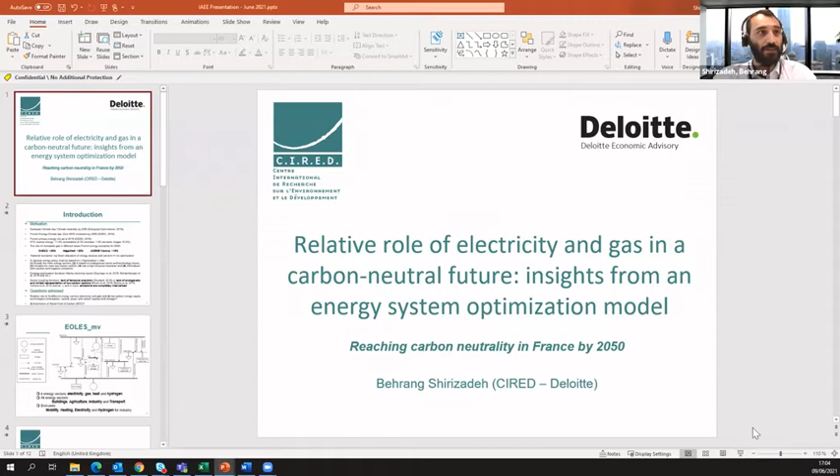Thank you. Hello, everyone. Just to make sure, do you have my screen? Yes. Oh, yes, yes. Great.

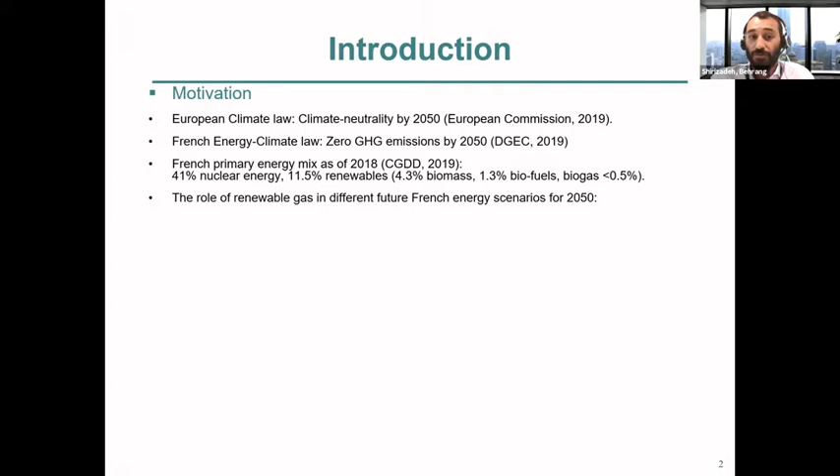But the role of renewable gas in different French energy transition scenarios, as you can see, SNBC2, the French Ministry of Ecological Transition and Solidarity's official plan of the country, is 20% by 2050. Negawatt, a French association, also projects 20%, and ADEME, a French half public energy and environment agency, predicts 16%. However, we are quite far from it. As you can see, in biogas, we are less than 0.5%.

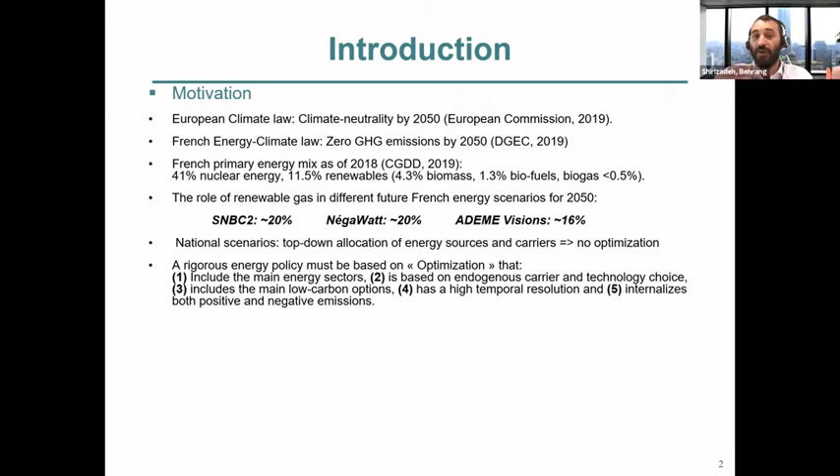But all these scenarios, they are quite interesting and nice, but they are all top-down allocation of energy sources and carriers. So there is no optimization. However, we believe that a rigorous energy policy should be based on optimization, where we should include the main energy sectors, and it should be based on endogenous carrier and technology choice. And also it should include most of the low carbon options, not all, but at least some representative ones. And it should have at least an hourly temporal resolution to take into account the variability of renewable technologies. And also we should be able to internalize positive and negative emissions by some social cost of carbon introduction.

Well, when we look at the existing literature on optimization, we see that it's mainly on the electricity sector. However, recently we had some sector coupling literature, basically coupling different sectors and allowing an endogenous interaction between them by optimizing the whole system. This is called sector coupling. And this is the most optimal case for a full system.

However, these existing studies that are quite recent are either suffering from lack of temporal precision, or a lot of sectors are chosen by top-down allocation, so exogenously, such as these recent works of Tom Brown, for example, that are very concentrated on electricity and electrification. And also in none of these studies are emissions internalized correctly. I'm going to talk only about direct emissions, but even direct emissions are not really internalized because we don't have any payment for negative emissions and we don't have any costs for positive emissions, but it's mostly based on some emission capping mechanisms and shadow price for carbon dioxide.

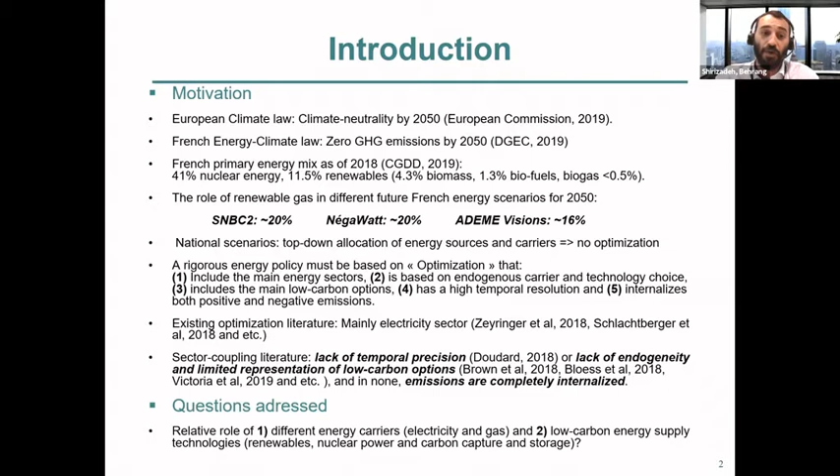So what we asked as questions is, what is the relative role of different energy sources: renewables, fossil sources with or without carbon capture and storage (CCS), and nuclear power? And also, what about the different energy carriers?

And of course, the importance of the social cost of carbon, which is basically the value that society attributes to one extra ton of emissions of carbon dioxide, which is presented like a carbon tax, in euro per ton CO2, but a carbon tax is only a positive emission value. However, the social cost of carbon can also be negative and it can give some remuneration.

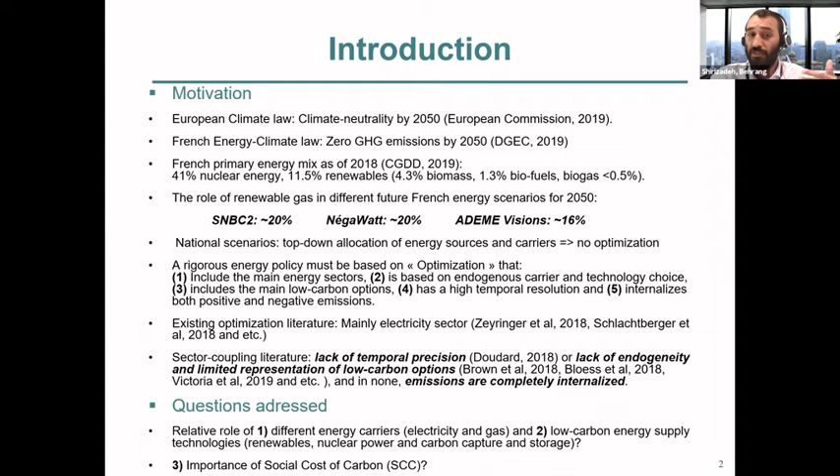So to do so, I developed an energy system optimization model. So let's take a look at this simplified version first. We have this electricity network, as you can see, with its own production technologies in round, and also its storage options, and a load, which is in triangle, electric load.

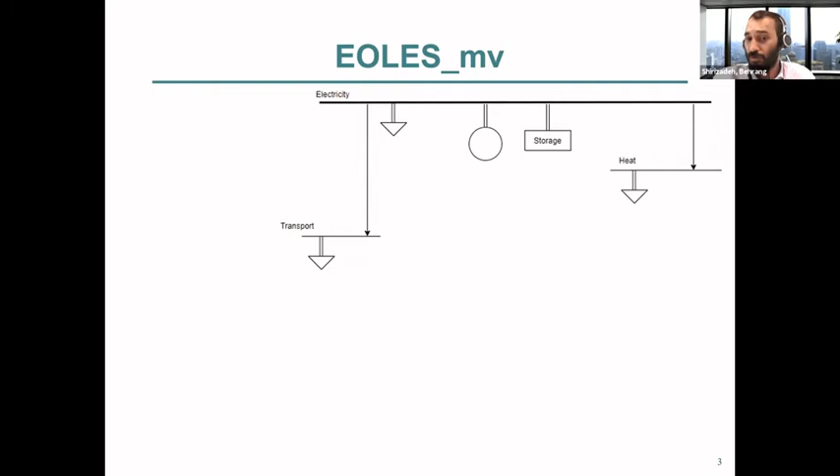First of all, we can decompose this load to have specific electricity load and transport sector, and also heat load for heating from electricity, and also hydrogen if we are to replace coal in the industry by hydrogen. And we can also then take into account the gas network with its own supply options, mainly natural gas and renewable gas technologies, so methanization or pyrogasification of biomass, and with its storage, which is already existing.

So we can also satisfy the transport and heat demands partially by the gas network. And also we can produce electricity from gas by thermal plants with or without carbon capture and storage. And also we can do some power to gas by methanation, from electricity to gas.

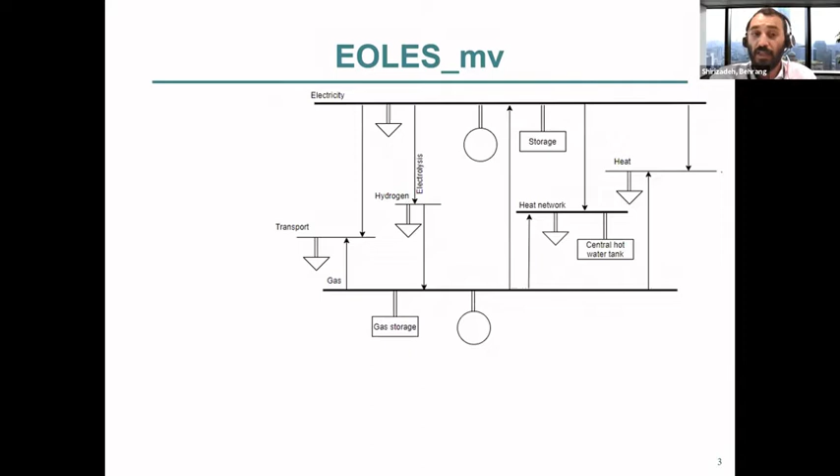On top of that, we can also take into account the heat network, which can satisfy a part of heat demand, which should be low temperature heat demand, and it should be a dense area. So basically the big cities, or at least cities, with, of course, its own storage options.

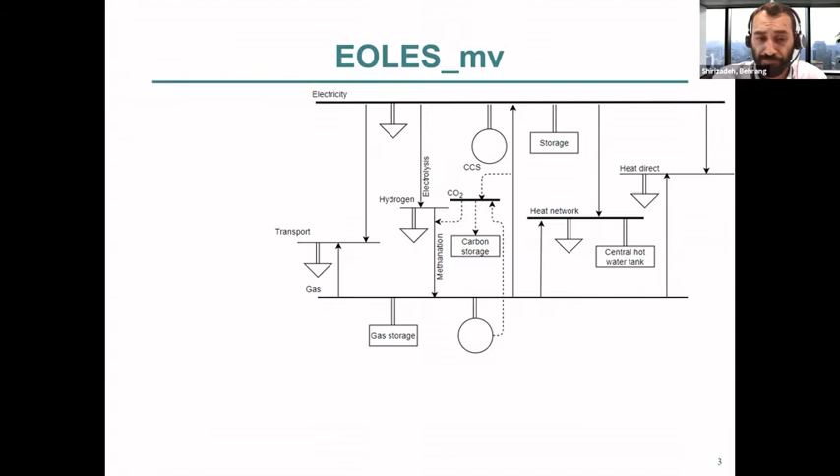So we can consider a carbon dioxide network as well, because we are supposed to maybe capture some carbon dioxide to store it. And also we can do methanation by using biogenic carbon dioxide, which is a byproduct of methanization, so anaerobic digestion. So then we will also need to account for the network for carbon dioxide. So it becomes something like that. There are a lot of technologies. I'm not going to enter into them, but supply technologies are less.

What I consider here are four main energy vectors: electricity, gas, heat, and hydrogen, because we are probably not going to have coal by 2050, at least officially, we are not expecting it as an energy source. Of course, we may have it as primary material, but not as energy source. And also, I consider all the main energy sectors, so buildings, residential and tertiary, agriculture, industry, and transport. And the main end uses: mobility, heating, specific electricity, and hydrogen for the industry.

Of course, heating is classified in three groups: low temperature, which can be every technology; mid temperature, which is some of the electrical technologies and combustion of gas; and high temperature, so more than 300 degrees, mainly in industry. And although we can produce high temperature heat from electricity, it requires a lot of structural changes. So I consider exogenously that it can only be produced from gas combustion, so renewable or natural gas.

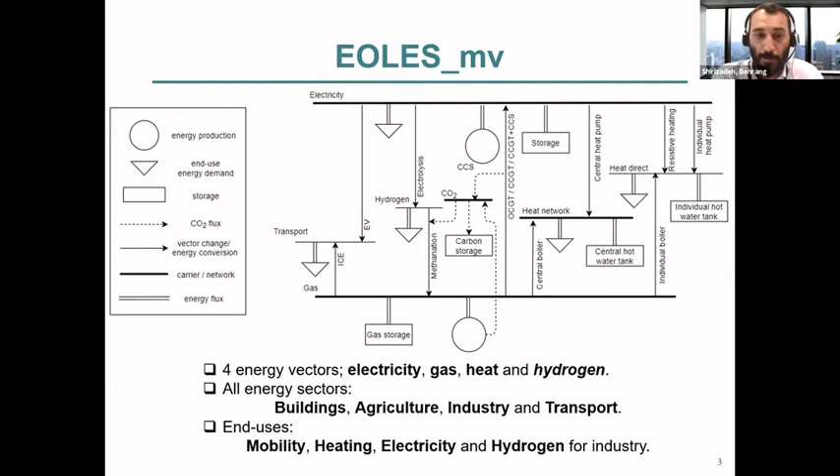So I applied this model to continental France, and the horizon that I consider is 2050. So all energy demand, cost, technical and availability constraints and potentials are 2050 forecasts. But we don't have weather data for 2050, at least not publicly available in hourly resolution. So I consider 2006 as a representative weather year, based on a previous work where I modeled 19 years, and we had concluded that 2006 is a representative year for the period from 2000 to 2018 for France, and it's kind of half a climate cycle. So it is reliable, let's say.

That's what we consider. And this is of course a greenfield optimization model. So it's only a static model, and I'm just going to show you an ideal 2050, where we are constructing it from nothing, if we do some optimal investments based on all these hypotheses that I counted.

So let's take a look at the primary energy production. This graph shows the yearly energy production from each of the technologies as a function of the social cost of carbon dioxide. So I made a variation from 0, no social cost of carbon, to 500.

The colors are representing the different technologies. So this brown color is natural gas. The dark green is methanization, so anaerobic digestion. So this is a renewable gas, and pyrogasification of biomass is the light green. So it's also renewable gas, but it's produced from biomass, so it's produced from solid renewable sources.

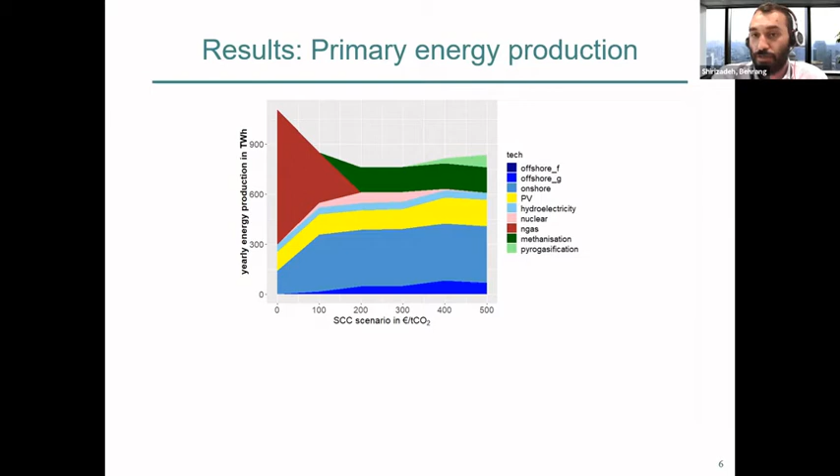So here, well, let me just clarify one point. All these gas production technologies are represented in terawatt-hour thermal, so their useful form. And all the electricity production technologies, so nuclear and the renewables, are all presented in terawatt-hour electric, so they're useful primary energy source.

If we take a look at this, we can see that without any social cost of carbon dioxide, more than 70% of primary energy comes from natural gas. However, as we increase the social cost of carbon dioxide, so I will call it SCC to make it faster, it reduces, and we can see that for 200 euros per ton of CO2, we have no natural gas in the system. So basically there is no fossil. And this is natural gas phase out.

On top of that, although the energy system seems quite highly electrified, as you can see up to this pink color, mostly it's electricity, but still we have at least 20% of gas, mainly renewable now, once it's carbon neutral. We have at least 20% of gas as an energy source, energy vector.

And nuclear power, as we can see, appears for 100 euro per ton of CO2. So this is the pink color, and it never exceeds 8%. And it also disappears at high social cost of carbon dioxide. I'm not going to enter into details, but it's because we do a lot of methanation when we have high social cost of carbon dioxide, to burn this methane to produce electricity with carbon capture and storage to make money from negative emissions. That's the reason, but I'm not going to enter into detail because I'd lose a lot of time on it. But you can ask questions if you want any clarification.

So each energy carrier, for example electricity, this graph shows the electricity production from different technologies. And the negative part is the use of electricity in different sectors other than specific electricity demand. I'm not really going to enter into the details because the main messages were already in the primary energy supply side. I'm going to mostly go to transport and heating sector. But before that, I also want to show you the gas supply and, again in the negative side, the use of gas in different sectors.

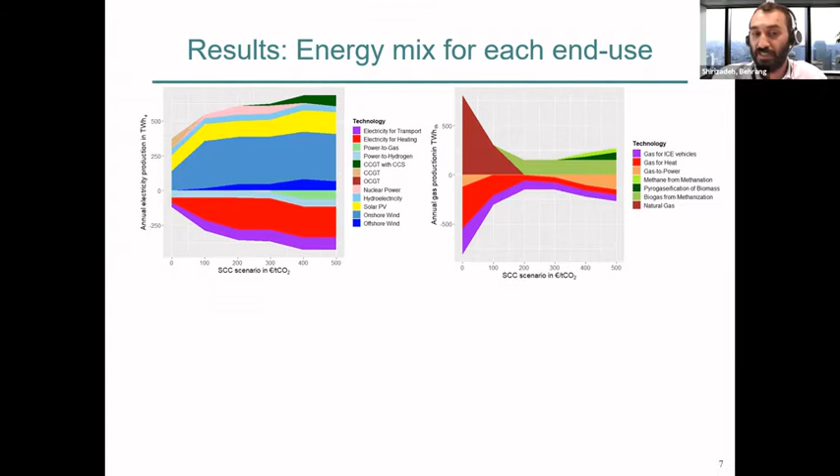This graph shows the annual transport demand in billion vehicle-kilometers. So this blue color is electric train, which is fixed exogenously because we already have electric trains. And this light green is electric vehicle for light transport. We don't see it, but there's a very tiny bit of electric bus on top of that, but it's really nothing. And then we have dark green, we can see a bit of it. It's electric vehicle for heavy transport.

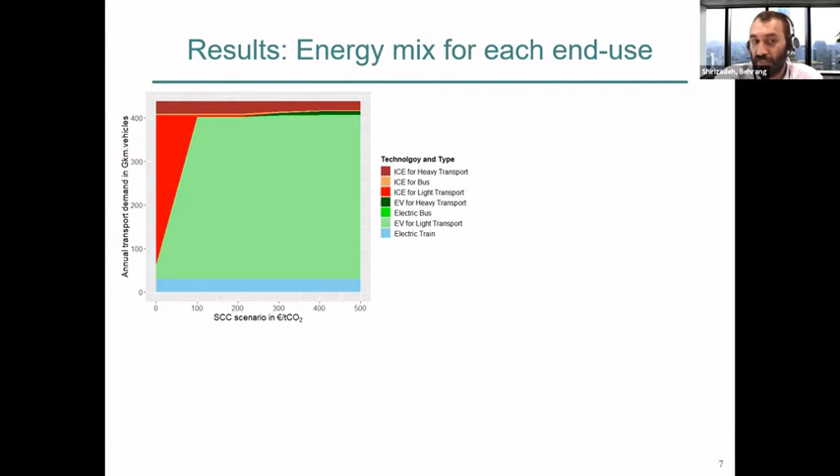And then we go to reddish colors, which are internal combustion engines based on gas. So I have only gas and electricity as vectors, but we can also consider gas as a representative for liquid fuels as well. We can see that without any social cost of carbon dioxide, most of the transport is gasified. Actually, even light transport is nearly completely on gas. But by increasing the social cost of carbon dioxide, even for €100 per ton of CO2, nearly all of the light transport is already from electric vehicles.

But still, as you can see, the heavy and bus transport sectors are still remaining gas fueled, even for high carbon tax, although we have a small part of electricity in them. So basically we have a highly electrified transport sector, but not for all the types. And of course, I don't consider boats and airplanes, which can be different. I'm just considering internal transportation of France with no airplanes nor boats.

So if we take a look at this second graph, this is heat demand and also production by source, again, as a function of social cost of carbon dioxide. Again, here we can see that for zero social cost of carbon dioxide, we have around 80% of heat production from gas. However, as we increase the social cost of carbon dioxide, this light green, which is resistive heating, this red color, which is centralized heat pumps, and this orange, which is individual heat pumps, are taking over, and it becomes like half electric and half gas.

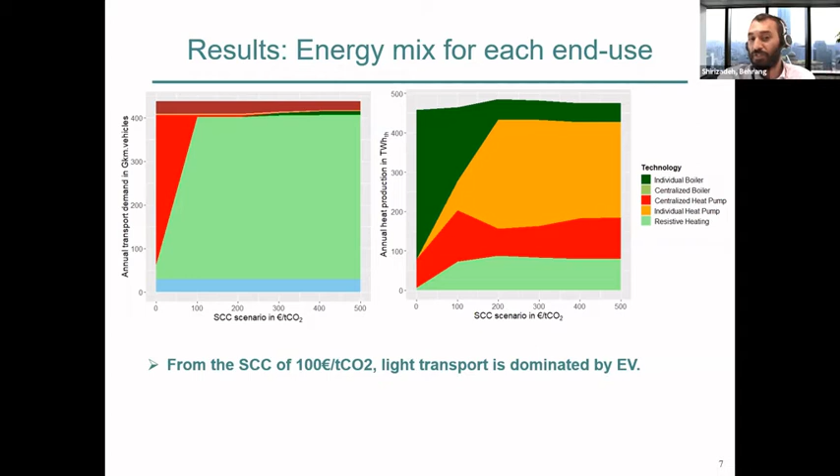And again, as we increase it from 200 on, most of the heat is electrified. And this small part, which is remaining still in dark green, which is individual boilers, this is because of the industry. So high temperature heat demand that I already fixed, that can be only satisfied by gas.

So now let's take a look at the emissions of such a system. So again, this is the emissions of the energy system, direct emissions, of course. I'm not considering indirect emissions, as function of social cost of carbon dioxide. As we can see, for zero, we have high emissions, like more than 150, nearly 200 actually, megatons of CO2 emissions. But as we increase the social cost of carbon dioxide, we decrease obviously, and we reach carbon neutrality at €200 per ton of SCC value. And as we increase it, we can go up to minus 25 megatons of negative emissions.

And Behrang, if we take it, yes? You have 5 minutes, okay? 5 minutes left. Great, thanks.

And if you take a look at the cost, here I have to make a small definition. In my objective function in the optimization, I have the social cost of carbon dioxide, which is internalized. So we have basically a technical cost part, and on top of that, we have this virtual social cost of carbon dioxide, which is not virtual, but it's an internalization of an externality. So this filled line shows this social cost, including the social cost of carbon dioxide. But this dashed line is only the technical cost. It is only the material and physical cost of the equipment and energy technologies.

So basically this difference between these two is actually the value of emissions, so the cost of carbon dioxide emissions. So when the technical cost is below the social cost, it means that we have positive emissions. And when it's above the social cost, so this dashed line is above the filled line, this is the other way around. So we have negative emissions.

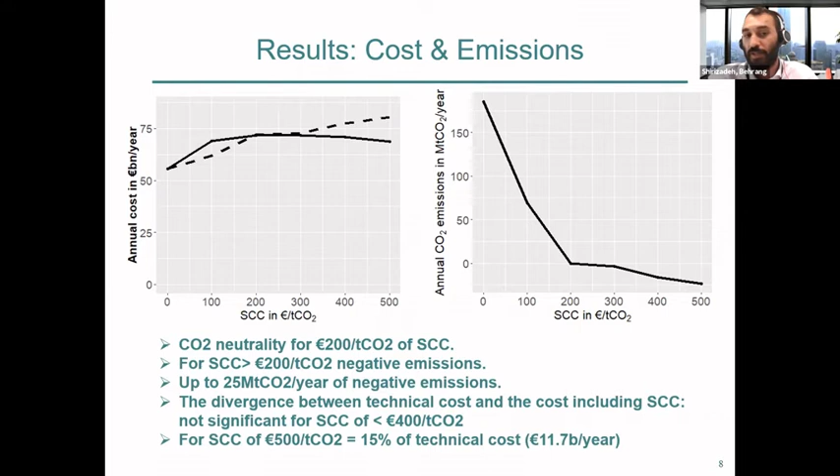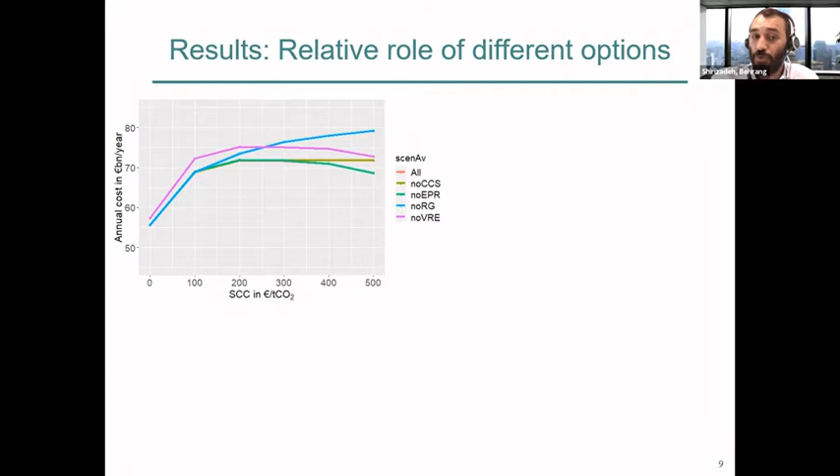So what we can conclude here is that variable renewable electricity technologies and renewable gas are the main enablers of cost optimality in the energy system in a carbon neutral future. And if you take a look at the emissions graph, the colors represent the same scenarios. This one is the annual CO2 emissions as a function of social cost of carbon dioxide. And as we can see, it's again the same message, renewable electricity and renewable gas.

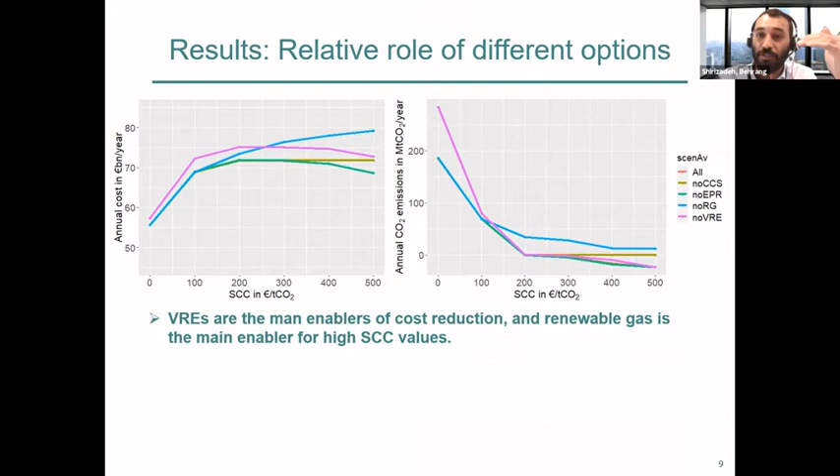However, this green color shows the nuclear power, which actually sticks to the red one in both of the cases. So nuclear energy has very limited and small environmental and economic benefits in a carbon neutral future.

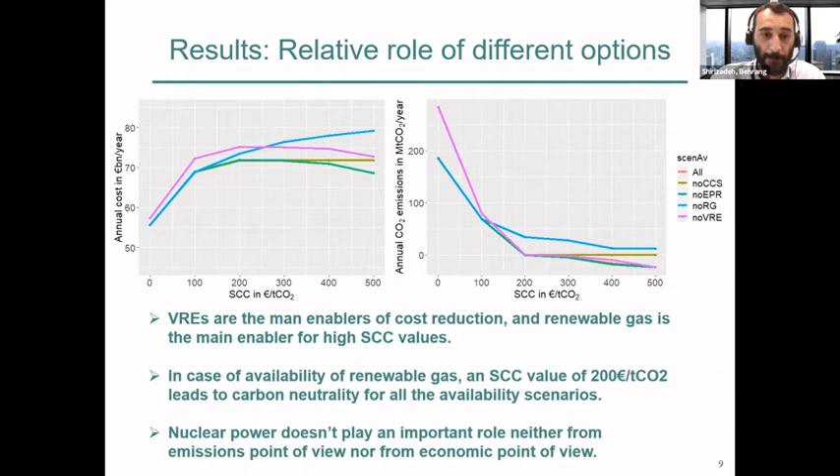So that's all. I'm just leaving my conclusion here because I think I'm out of time. So you can just read and ask me any questions that you have. Thank you for your attention.

Thank you, Behrang. Very interesting presentation. Congratulations. It's very clear that the price of carbon will be key to the decarbonization process. I would like to know if any of the colleagues have questions for Behrang.

Yes, hello, Behrang. Thanks for this interesting presentation. I have two questions basically. So you considered France as an isolated system, but obviously France is not isolated. What could be the impacts of the neighboring countries on the system? Is there anything that you could say on this?

Yes, sure. Basically when we have a highly renewable system, the interconnections are helping to manage this variability. As we see, the optimal case is more than 90% renewable and even 100% for some social cost of carbon values. So having the interconnection with neighboring countries will help us to have this geographical aggregation and probably reduce the required storage.

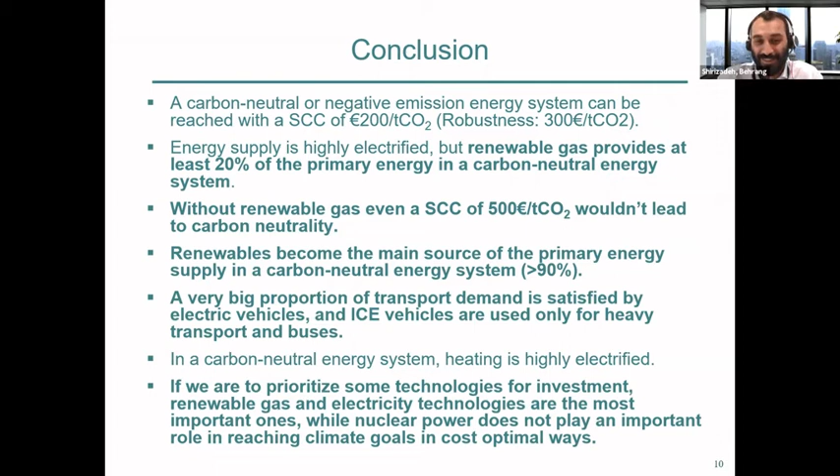I see. Thank you very much for your answers. Thank you. Any other questions for Behrang?

Actually, I'm very curious. You were talking about nuclear on slide 6, about the negative. It was negative costs, right?

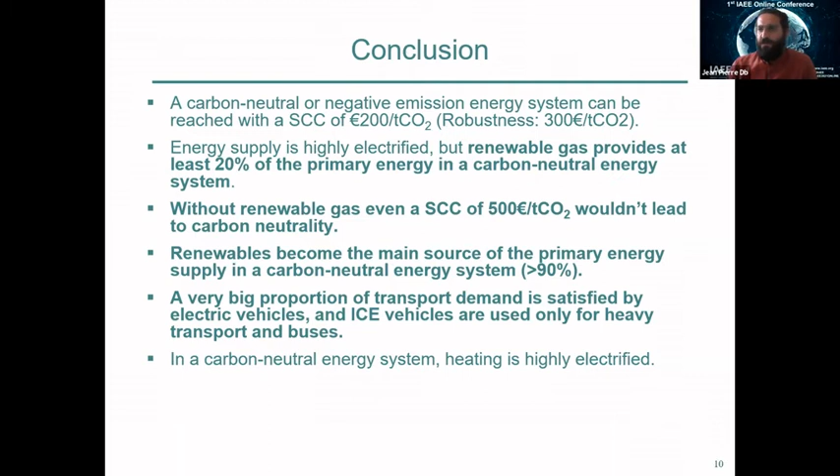Can you please explain about that, because it's actually very interesting? This here, right? When we don't have nuclear at 500 euros per ton of SCC. Well, the point is that nuclear power can be very useful to produce extra electricity because it has a small and dense electricity production, which renewables don't have. But there is another problem here: nuclear power also has its variable costs, both on the operational side and also in fuel and waste management and all these points.

However, renewables have zero marginal cost. So if we over-dimension the renewable electricity production side and produce more renewable electricity, we can do power to gas for free when we don't need it. Because in a fully renewable power system, in a previous study, I found that around 20%, even 25% of the time, the electricity price is zero. So if we do methanation for power to gas, we produce gas from this renewable electricity, whereas nuclear is going to be a bit more expensive.

It's going to be maybe 15, 20 euros per megawatt hour. So it's not an expensive price, but compared to renewables, it is more expensive from this market point of view. And that's the reason why we produce a lot of gas, but we don't need to consume that much gas. So we also do a lot of gas to power with carbon capture and storage to make negative emissions and make money from that.

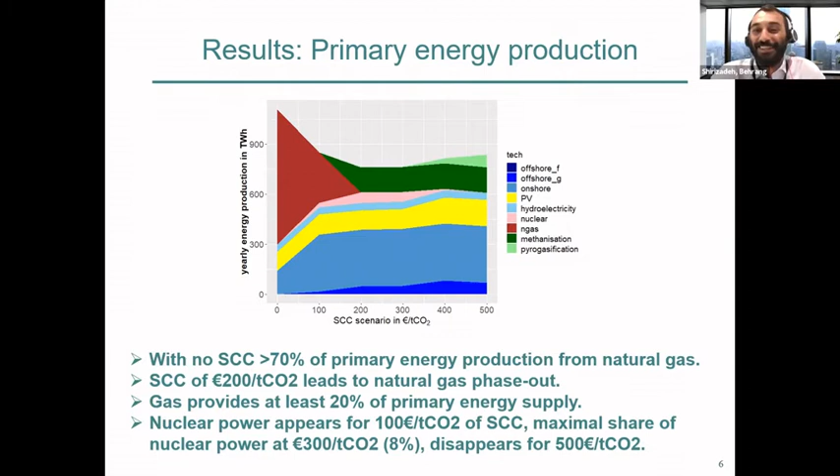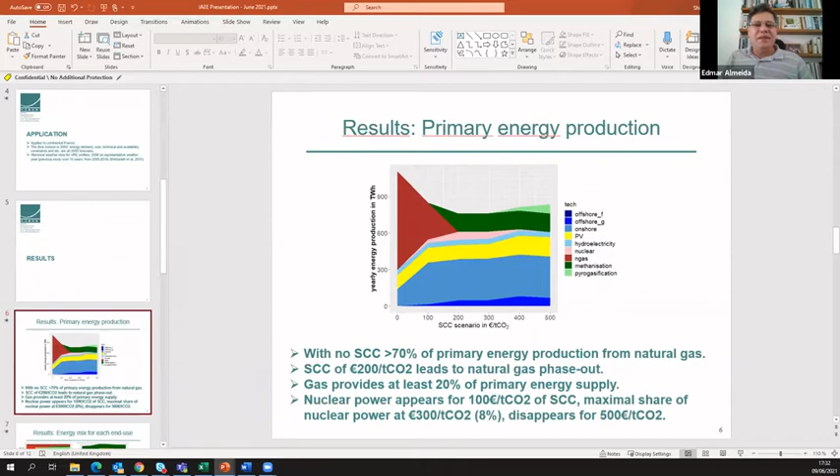I think we are running out of time and we should move on so we don't have problems with time for the other presentation. So now we're going to move to the presentation of Sebastian on obsolescence of the gas distribution grid in urban areas, an open source modeling approach for the gas phase out in local neighborhoods. You have 20 minutes, Sebastian. Have a good presentation.

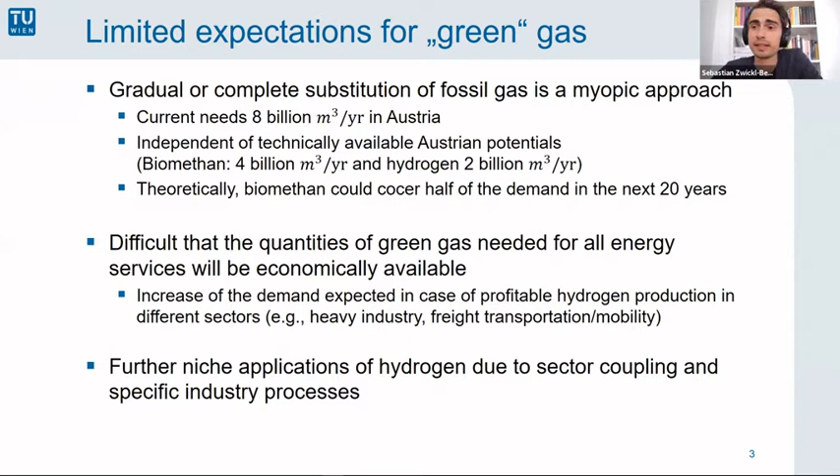So the scope of this work is, first, demystifying the unique or current dominant position of natural gas in the provision of heat services, in particular low temperature heat services, decommissioning of the existing gas distribution grid infrastructure, and also triggering emerging sustainable and highly efficient energy supply alternatives.

So these are the benefits, and we also want to show that continued repowering of conventional energy technologies is no future business case, no maintenance of known business models. And, as in the presentation so far, we want to include and internalize the costs of inaction, for example, in this work as penalties for failing to meet climate targets.

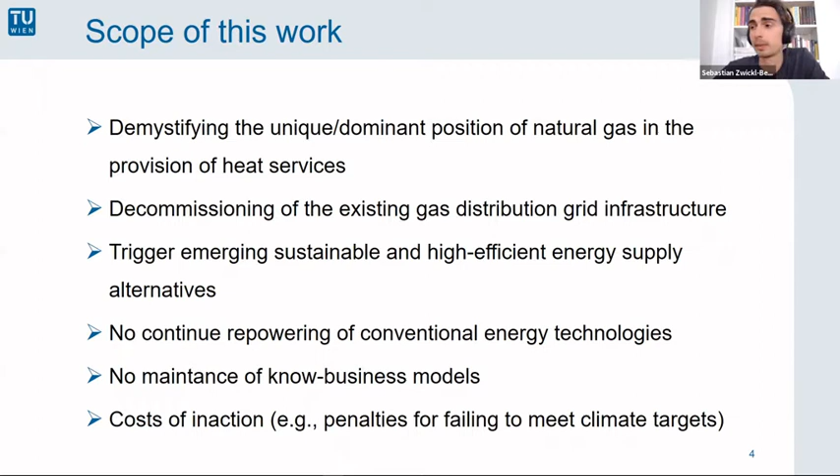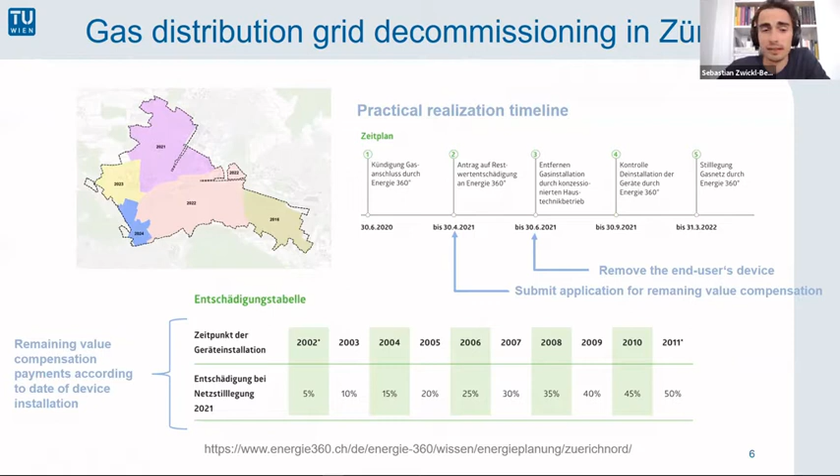So let's return to the core objective and novelties of this work. So first of all, as I said, the decommissioning of the natural gas distribution grid and corresponding natural gas phase-out in the low temperature heat supply of an urban neighborhood, to quantify alternative distribution grid capacities and highly efficient sector coupling technologies that are required to ensure an adequate but sustainable development in the provision of local heat energy services.

We analyzed in this work in particular two different deep decarbonization pathways on a local level. On the one hand, a high electrification scenario where we replace natural gas by electrification of the energy services. And on the other hand, a scenario which is called a network scenario, where we analyze an expansion of the district heating network all over the district.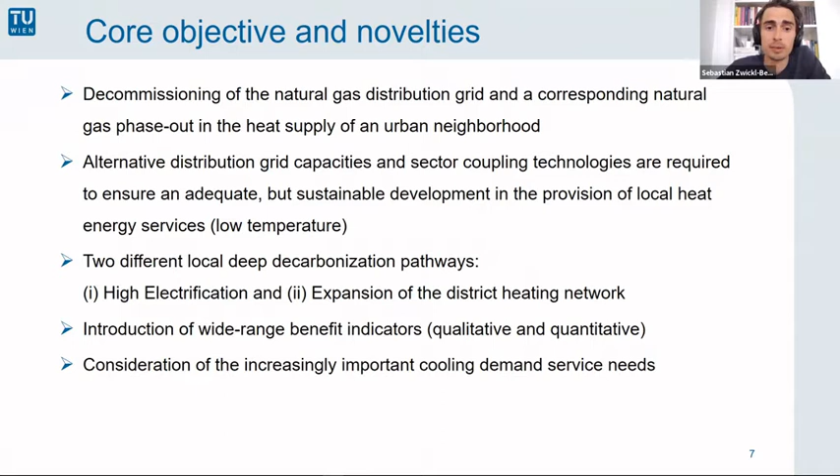We introduced a wide range of benefit indicators to quantify our results both qualitatively and quantitatively. And, this is to some extent very important, if we talk about heat supply or energy services on a local level, we also considered the increasingly important cooling demand service needs on a local level.

So let's jump into the description of the methodology applied. It builds upon and is an extension of one of our works recently published in Applied Energy. In this work, we focused on the energy sharing among different consumers within an urban district in Vienna. And we considered high shares of local renewable energy generation. And as one key finding in the sensitivity analysis, we analyzed different CO2 prices triggering a substitution of natural gas-based heat supply by other sustainable alternatives.

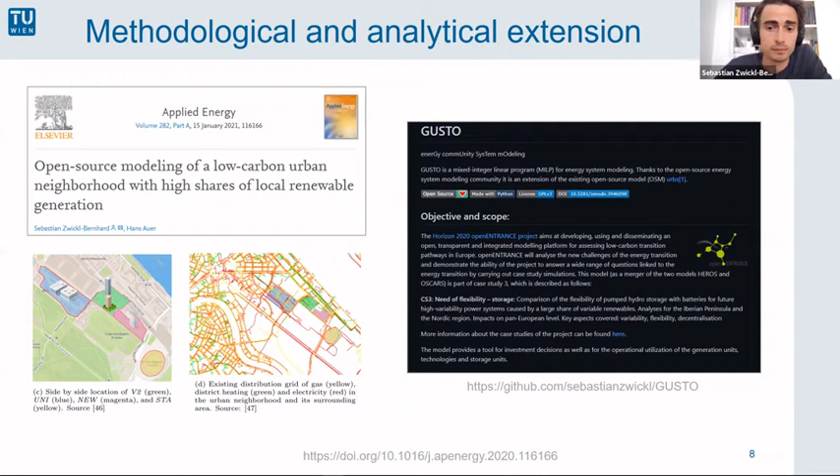So as I said, the model used in the Applied Energy submission is called GUSTO. This model enables a high temporal resolution of the energy demand. In this work, we analyzed the building stock of an energy community, of an urban district. Therefore, we split the existing building stock into different characteristic building types. And here you can see some of the inputs for our analysis of the natural gas distribution phase-out,

where we used the model GUSTO to estimate the increase of the peak demand per building type, as you can see on the left-hand side, for a characteristic multi-apartment building. The green line shows the baseline, the current electricity demand. The orange line shows the case of an electricity-based heat supply, and the blue one shows the electricity-based heat and cooling supply of a specific multi-apartment building within the area.

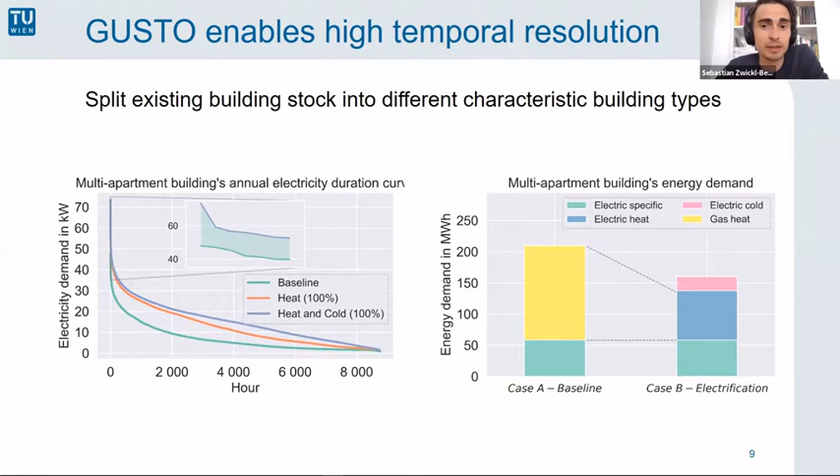So in the left-hand side figure we see an increase of the peak demand per building type, and this was used for a second open source model, which is called rivus. This open source model is developed by TU Munich and is also available on GitHub. GUSTO's peak load results are used in rivus, which is based on graph theory, as you can see in the right-hand side figure. It is a mixed integer linear program and enables cost-minimizing multiple energy carrier network expansion.

In the figure on the right, you can see the sources of a specific energy carrier indicated by the squares and the demand indicated by the triangles. And the model is used to optimize the network infrastructure on a specific distribution grid level.

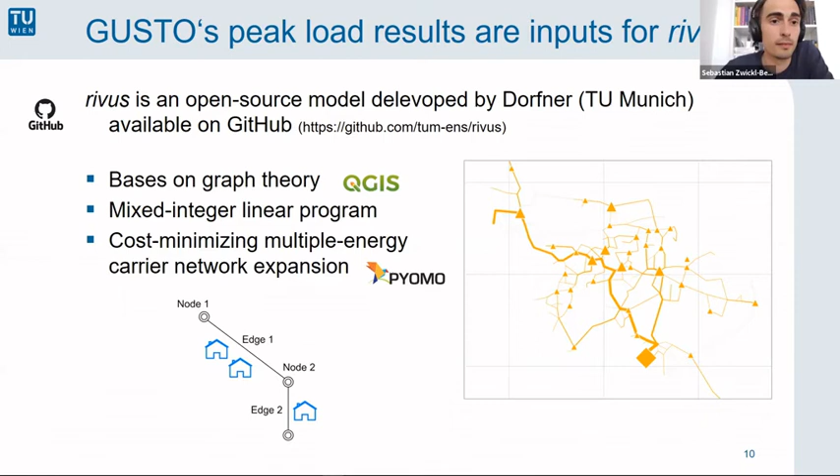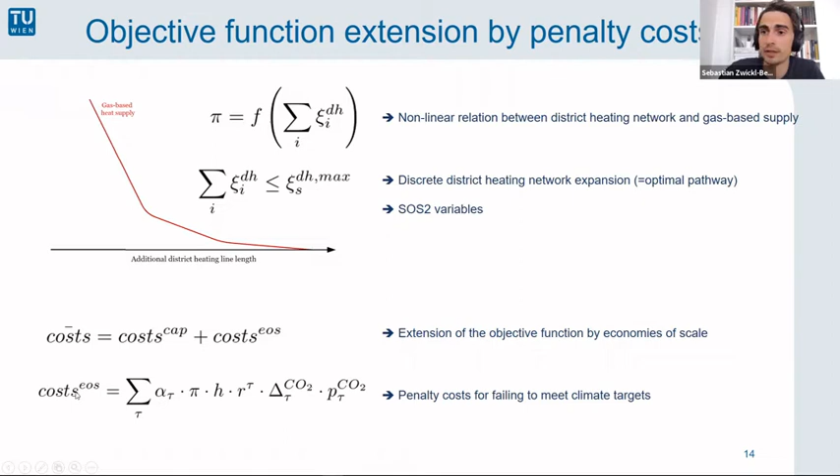meet climate targets. In the end, it's a result of this nonlinear function between additional district heating line lengths and gas-based heat supply. You can see here, π is, for example, the connection capacity of gas-based heat supply, and this is directly included into the cost part, which is called economies of scale for failing climate targets.

So now 5 minutes left. Fine, 5 minutes left for the results.

Yeah, fine. So now let's come to the results. Here you can see the fundamental results of this analysis, where you can see the distribution grid in the district for two energy carriers or two different networks. For example, electricity on the left-hand side and natural gas on the right-hand side. You also see, as I mentioned before, the different building type categories, where we split the building stock into different categories to assume or calculate the projections of increased peak demand.

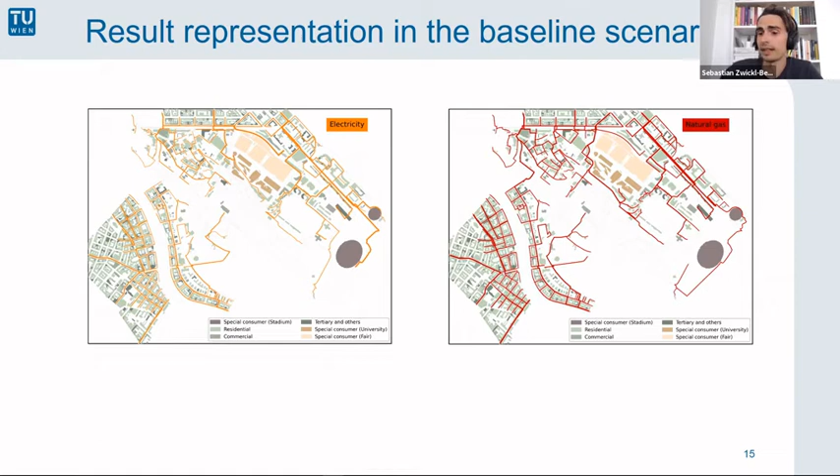On the right-hand side, you see a massive existing natural gas distribution grid within the district. Here you can see the results of the two different decarbonization pathways. On the left-hand side, as I said, the high electrification scenario, where we replace natural gas and supply the energy services on the basis of electricity.

And on the right-hand side, you see the network scenario, where we replace the gas distribution grid by a massive expansion of the district heating and district cooling network. On the left-hand side, you see the specific capacities illustrated by the violin plot for electricity and district heating. You see the comparison between the current state of supply, which is called case A, and case B, which is the high electrification scenario.

You see the difference in the max line capacity here, and also the difference in the mean line capacity here. And at the bottom, you see the heat map, where you can see the different possible lines that could be implemented to supply the area, the specific lines that are used in case A, and the additional lines that are used only in case B. And at the bottom, you also see the implemented line for the district heating network.

On the right-hand side, similar illustration of the results, so it's easy to compare the results. You see the difference in mean and max line capacities of the district heating network. And at the right-hand side bottom, you see the matching. If we consider the heat service needs and the cooling service needs, we see a high matching between implemented lines for the heating and the cooling network expansion. Only a few lines are unused in case C in the network example.

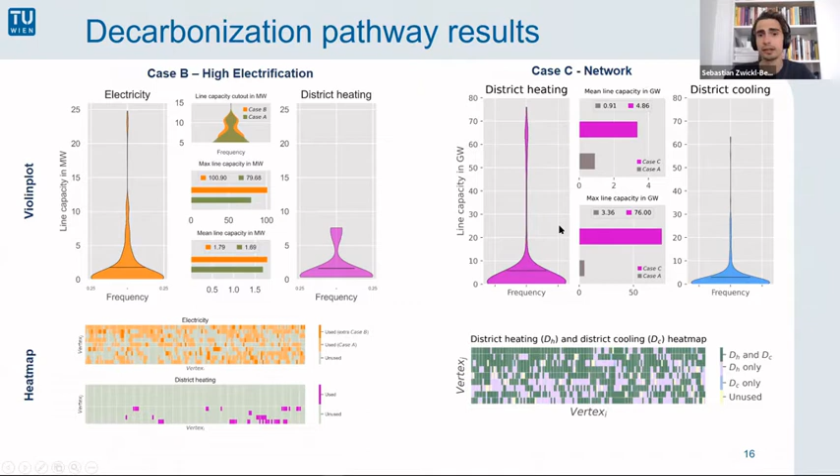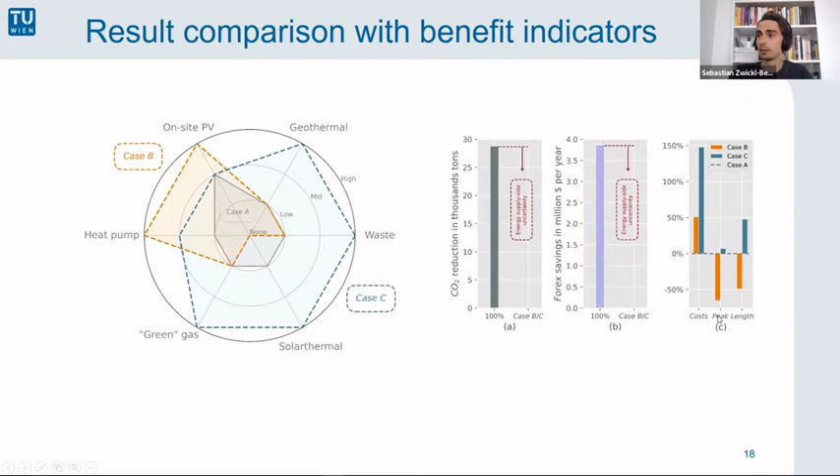And future work should address, among others, energy generation technologies and the mix feeding into the district heating or district cooling network, as I mentioned qualitatively here, waste incineration and seasonal heat storages. And of course, also include the local mobility service needs into the local energy service needs.

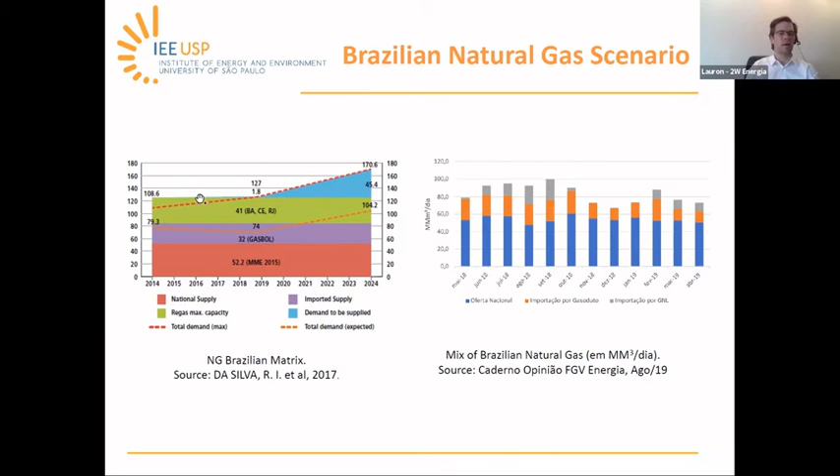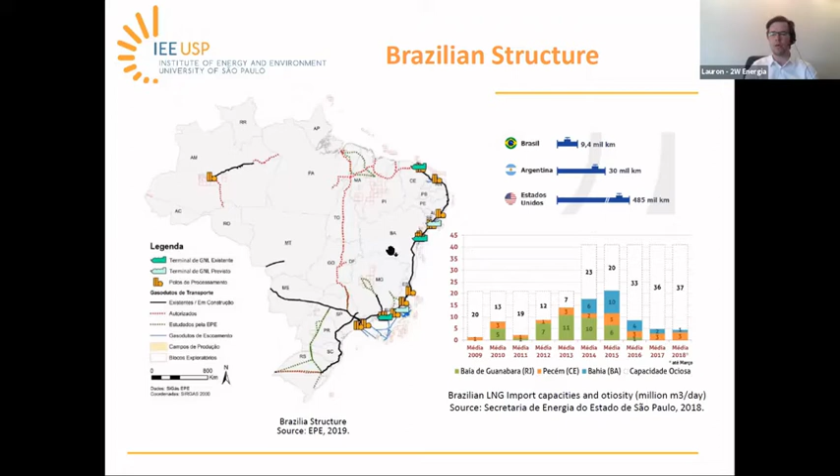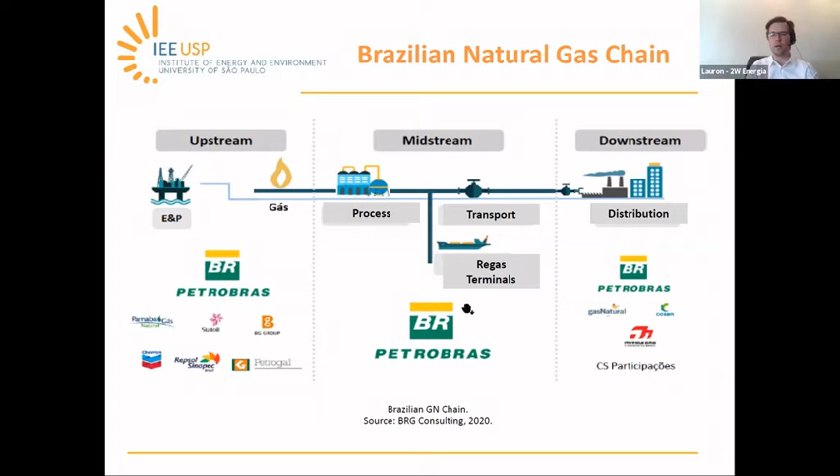With this new gas market that was created by the government, one of the main points is to eliminate the private monopolies, like the one I mentioned about Petrobras, and create some possibilities to give attractiveness to the market, make new players enter and operate in this market, create the opportunities, the financial possibilities and attractiveness for the new players, giving more integration with the electrical system,

giving more defined and clear rules about the operation of the thermal power plants, when they have to be put in the system. And one of the main points is the harmonization of the state and federal regulations that we have at this moment in Brazil.

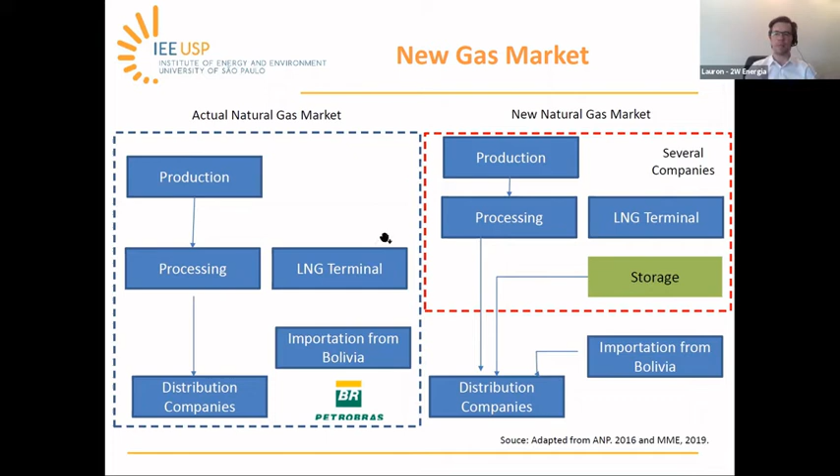So what challenges will Brazil face in developing an LNG market? Looking at the regulatory points, the new rules allow sharing the structure and the terminals, so different companies use the same terminals. Until this moment, that is a great problem in Brazil. All 3 terminals from Petrobras are operated just by Petrobras, and as we saw before, these terminals are not used at their full capacity. They can be used and shared with different companies.

About tax, the importation using a gas terminal ends up changing hands and becoming an internalized product. Here we have some problems with taxes when sharing a terminal. With different companies, it's difficult to separate the product and tax each one.

One challenge must be seen when we talk about LNG vessels. They represent a large storage capacity, and must be linked to a great consumer. That can be a problem. We can see a solution as an anchor, a great company as a main consumer, and it gives the opportunity to other little companies in a secondary market behind this great company, something like this.

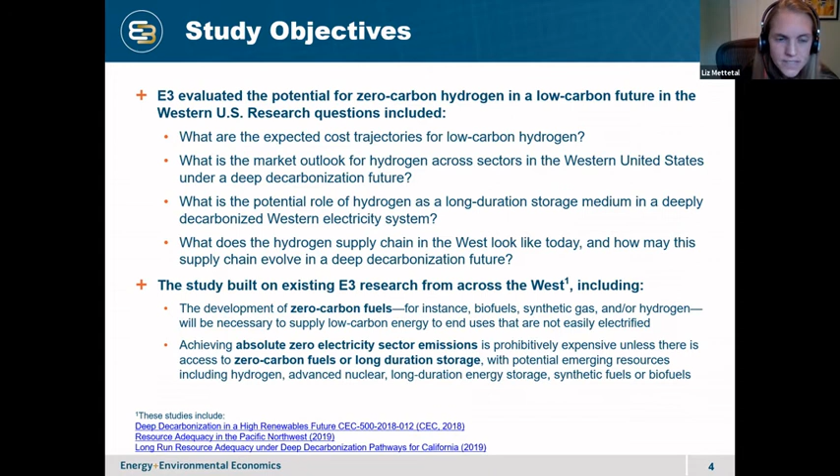So one other point I wanted to note is, why are we talking about a low carbon future? And that's because a lot of our modeling is not based on comparisons to, say, the social cost of carbon, which I think is super valuable and a very interesting comparison to do. But we're really, in this modeling exercise, focused on what does the policy say we have to do? And taking that policy assumption as given, and then looking at the cost-effective ways to achieve those policy mandates.

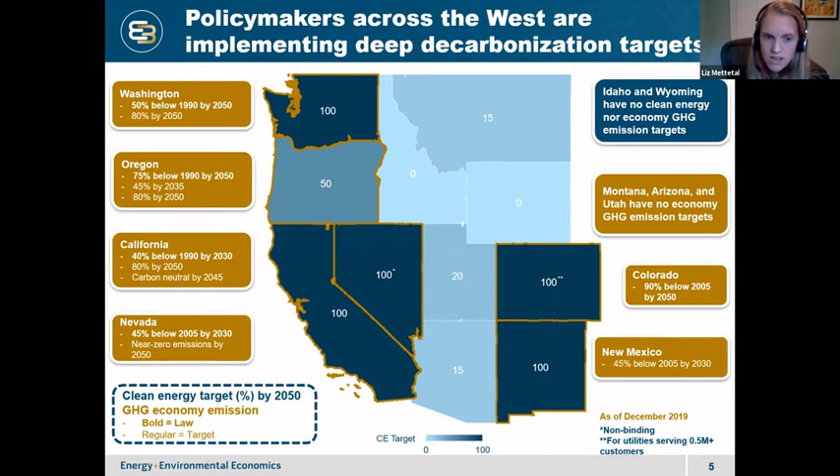So this is just a map of the West and the clean energy targets. The targets for the electricity sector are in blue, I believe, and the gold is the economy-wide emissions targets. What I'll draw your attention to is California, for example, has SB 100, which is a policy that basically says 100% of retail sales needs to be supplied by renewable energy and zero carbon resources, I believe by 2045. And then they also want to hit carbon neutrality. And there's several other states in the West that also have these deep decarbonization targets. And we use that in building some of the price forecasts that inform the modeling for this study.

So I'm going to start with a slide just on the production of hydrogen and what we assume about hydrogen production costs. Then I'll talk about some of the analysis that we performed and our key findings. So this is a spreadsheet model to estimate the cost of hydrogen. Basically, hydrogen can be produced by extraction from water or extraction from fossil fuels. And the cost of hydrogen is going to be extremely relevant to our assessment of its potential applications and how it might compete across different verticals.

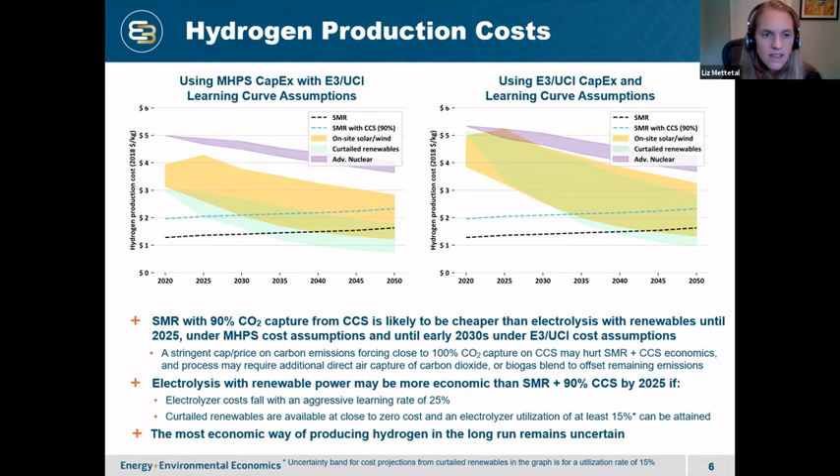So we did two main analyses that use those hydrogen costs for the power sector. We start with E3's Aurora market price forecast. E3 develops scenario-based market prices that reflect varying assumptions about future policy scenarios in the West. We used a deep decarbonization price forecast for the West that assumes attainment of the different renewable and clean energy targets being legislated in the West, assuming a lot of these states are going to hit their 100% renewable or clean energy targets. We're using the 2019 price forecast.

I'll note that some of these are 100% sales, and that doesn't quite equate to 100% generation. So you still see some gas generation on the system. Of course, if you're going to go to truly zero gas generation, 100% renewable generation, then that would just increase the opportunity for hydrogen.

So we take these market prices and we did two analyses. On the top, we did this E3 RESTORE analysis. RESTORE is basically an optimal storage dispatch model.

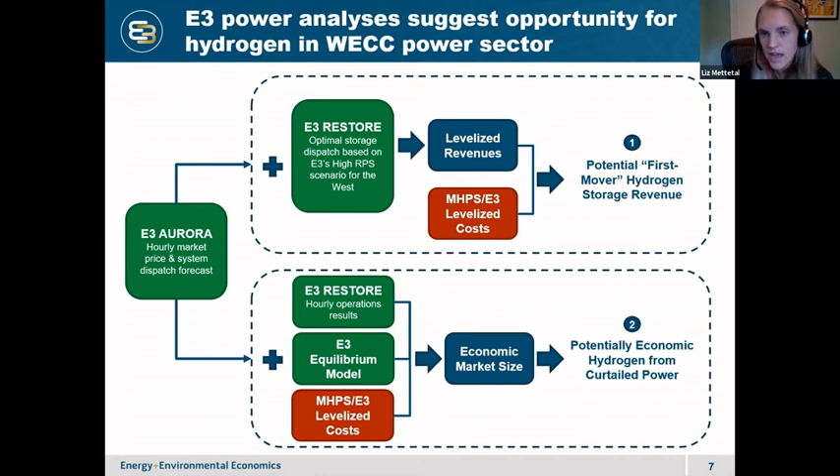One other point I wanted to make about the market is that we focus on the West here right now. The West is dominated by natural gas in California, coal in Arizona, some hydro in the Pacific Northwest. But given RPS targets and restrictions on natural gas, we anticipate that lots and lots of renewables are being added to the market, and we're already seeing that. And when we model market conditions in the West, what we find is what we call Dunkelflaute conditions. These are basically multi-day periods with low renewable output.

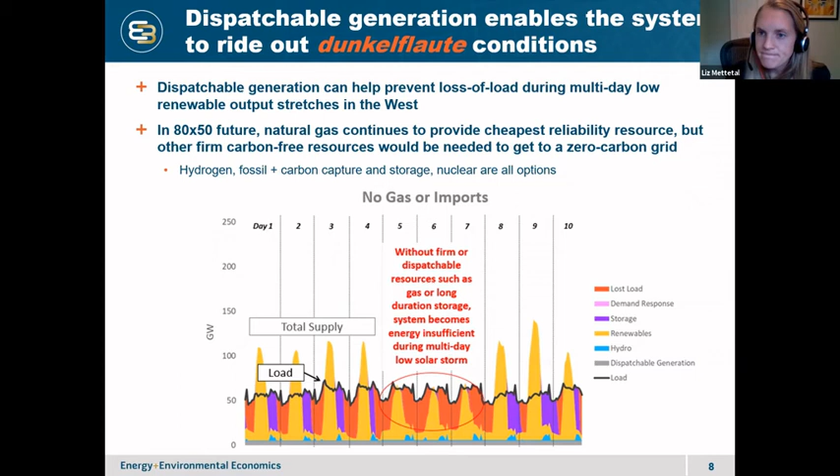You can see in this simulated day at the bottom, yellow is the renewables. They're over generating in the middle of the day. You're using it to charge storage. That storage is in purple. That battery storage can then dispatch after it's been charged. But when you have these multi-day periods with low renewable output, we're only adding batteries to the system that are economic. So you're not getting much above a 6-hour battery that's cost effective. So you basically run into these multi-day periods where you need some form of long duration storage or natural gas to fill the gap, or else we're ending up in loss of load situations. And that multi-day period is really where the hydrogen arbitrage is profitable.

Please, you have 3 to 5 minutes to finish. Great. Okay? Yep.

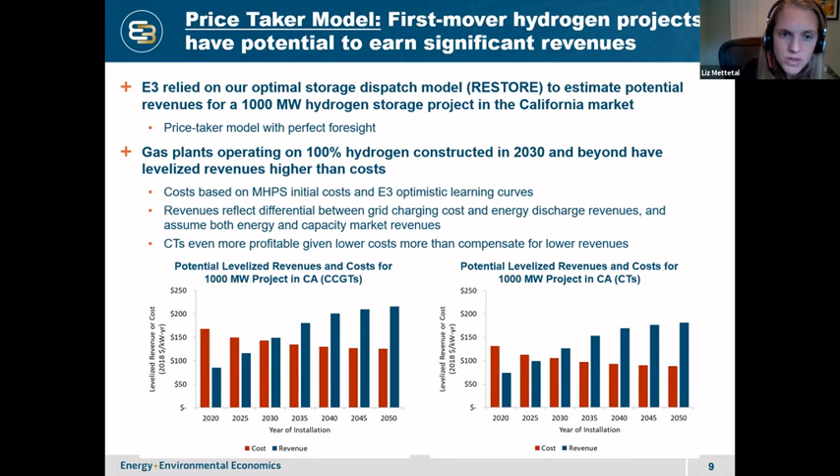I'm just going to give you a couple more punchlines on the results. In our first mover hydrogen market model, if you look at the lower left-hand side, you see the costs of a project are falling over time. That's driven by the reductions in the cost of hydrogen storage. The revenues are in the blue bars, based on the year of installation, shown every 5 years, and these projects start to become profitable around 2030. The revenues in blue reflect the difference between the energy discharge revenues minus the grid charging costs, assuming both energy and capacity market revenues from our market model. CTs are going to be less efficient, but their lower costs are really more than compensating for the lower revenues. So we find first mover projects by the 2030s are quite profitable.

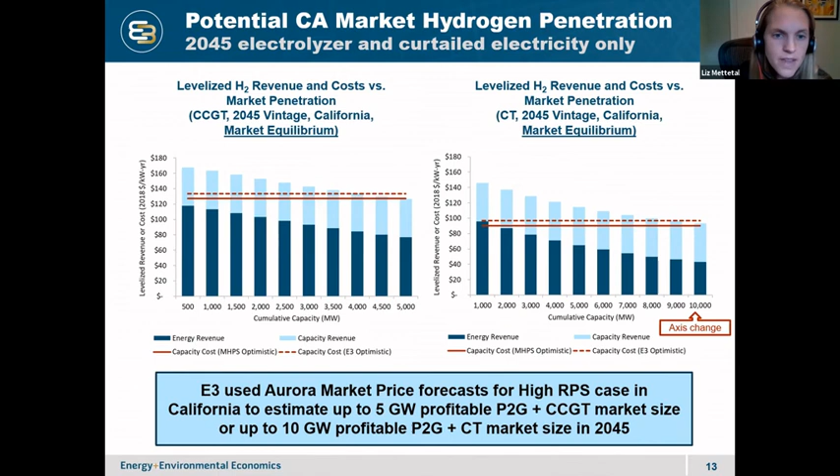So I'm just going to jump right to the takeaway. The takeaway from this study was that the most promising opportunity for carbon neutral hydrogen we found was as energy storage in the electricity sector, given those really aggressive RPS and 100% clean energy targets. Our estimate is a market size of around 10 gigawatts in California, and, not shown here, around 4 gigawatts in the Pacific Northwest. This was part of a much broader study, as I mentioned up front. We looked at other sectors of the economy and identified roles, particularly in heavy duty ground transportation, that hydrogen might play if they can reduce station costs.

But I think hydrogen's role is a bit more uncertain in buildings and industries where there are big structural and infrastructure barriers. And then I'll note that, as the production cost figure showed, the means of producing carbon neutral hydrogen in the long run remain really uncertain. It looks like blue hydrogen, if you have gas with CCS, is cheaper in the 2020s, but green hydrogen is increasingly looking competitive starting in the 2030s.

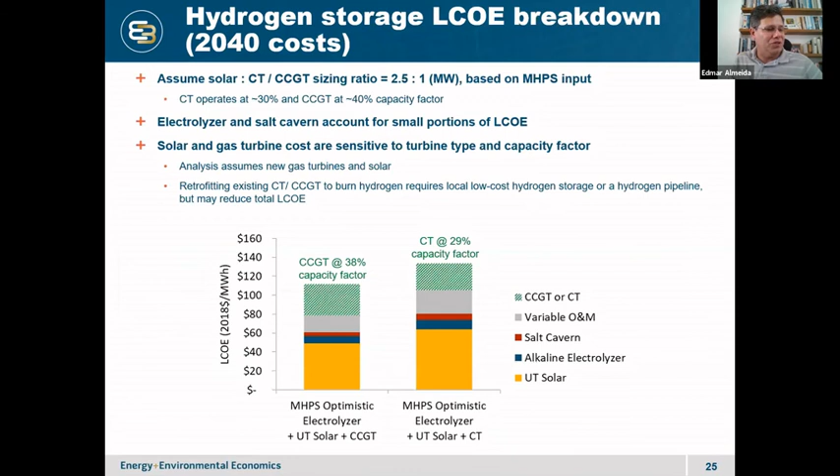Any other question, please? Okay, Liz, I have two questions. One is more methodological. How did you compare hydrogen as a source of flexibility to the power sector to other sources of flexibility, like batteries or pumped hydro systems? I'm surprised that the best application is storage for electricity. This is a very new result, because everybody's talking about using hydrogen for transportation or industry. So could you explain a little more about the methodology you used to get to this conclusion?

And the second one is, there are a lot of hydrogen projects popping up everywhere in the world, and you're showing clearly that they are not economical. So can you give us a hint of how these projects are being subsidized? Who is paying for that, since they're not economical or sustainable at this point?

So the price forecast that we are using already has baked in a ton of battery build in the region by 2045. We did not, given the scope of this study, include hydrogen in the initial price forecasting. So we are actually working on work that builds it in, basically builds it into the optimization.

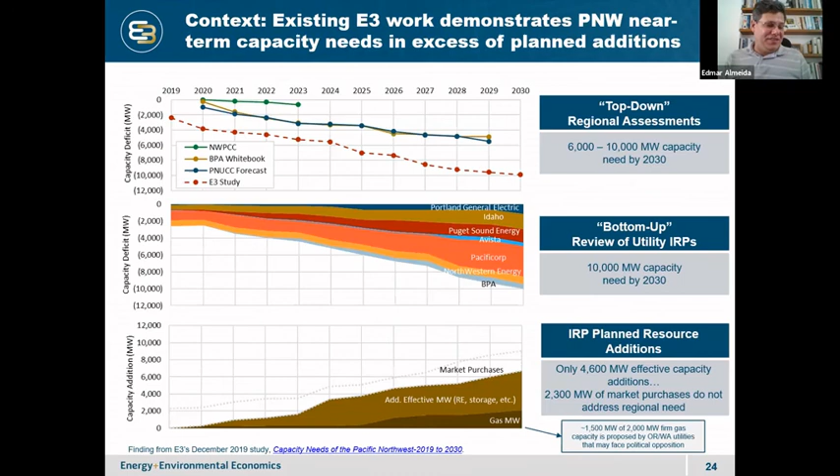Okay, so thank you very much. Very interesting subject. And yes, we see lots of projects. Everybody's talking about new projects. The projects are growing in terms of size. People are talking about 5 gigawatt projects of hydrogen for export. So I'm very curious to know how this is feasible. It was not in your presentation; this was just a provocation to see if you could give us some light on that. So thank you very much, it was very insightful. If there is no other question for Liz, last chance for the colleagues.

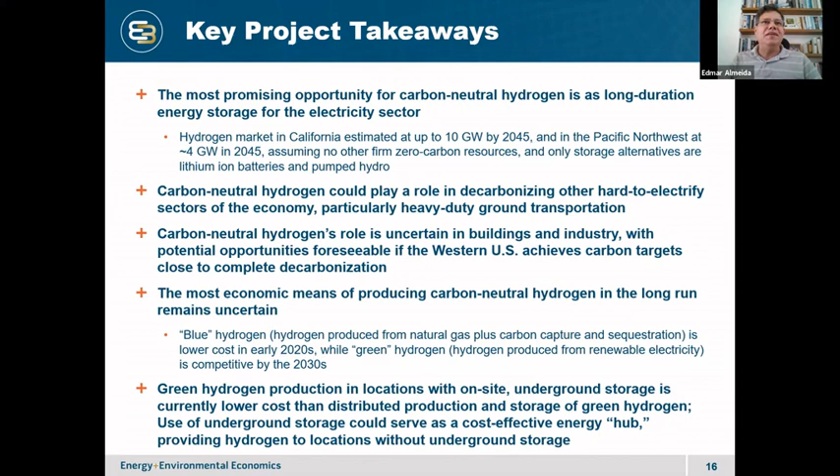If not, let's go to the end of this session. It was a very interesting session where we have seen different scenarios for gas. We saw a scenario of how to end up with gas, how to decommission. We saw the importance of the price of carbon for deep decarbonization and taking gas out of the energy mix. We also saw the situation in Brazil, where we are talking about questions that were important 20 years ago in Europe, but still we're going to live with gas for decades before we reach decarbonization, and it's much better to have a liberalized, market-oriented gas sector than a monopoly organized gas sector.

Even for decarbonization, I think that decarbonization will happen through market forces, and even if we want to go faster with decarbonization in Brazil, it's better to set market rules and make it a good environment for new strategies and business models, even for new opportunities like hydrogen. And then we closed the session with this very interesting presentation on hydrogen, very insightful. I learned a lot.